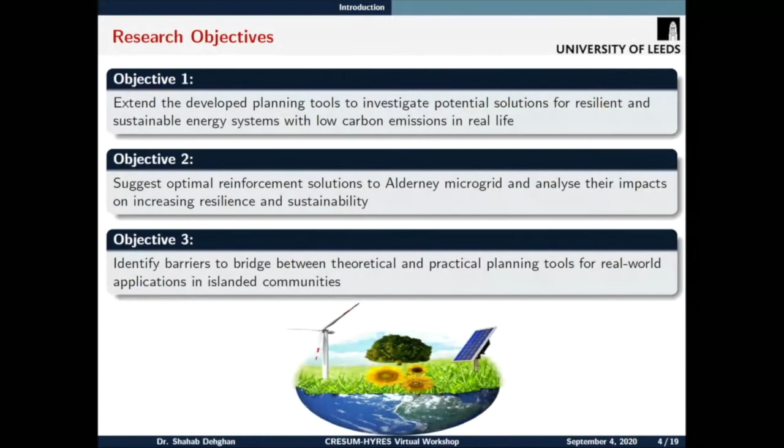So with this background, the main objectives of this project are firstly, extending the developed planning tools at the University of Leeds to investigate potential solutions for resilient and sustainable energy systems with low carbon emissions in real life. Secondly, suggesting optimal reinforcement solutions to the Alderney microgrid and evaluating their impacts on increasing resilience and sustainability. And finally, identifying the main barriers to bridge between theoretical and practical planning tools for real-world applications.

So we have utilized in this project PyEplan, which is an open source Python-based energy planning tool developed at the University of Leeds to create microgrids in the CRESUM-HYRES project. PyEplan is coded using Pyomo, and its first version has been released on PyPI. In general, PyEplan collects different inputs such as estimated load demand, estimated renewable power production, and network topology. It also includes 3 different modules.

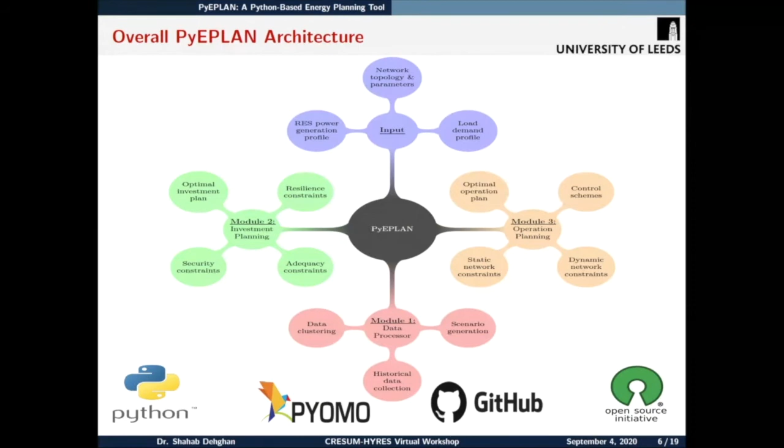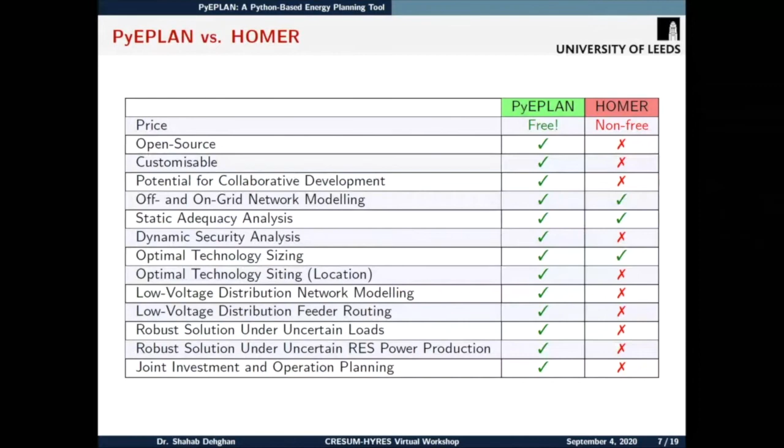The first module is focused on data processing, and it provides needed inputs for the second and the third modules. The second module provides the optimal investment plan for microgrids, while the third module provides the optimal operation plan for microgrids under different techno-economic constraints. PyEplan has also specific advantages as compared to other commercial software packages for designing microgrids. For instance, PyEplan is useful for both static and dynamic security analysis, uncertainty management, and joint investment and operation planning, which are impossible on other software packages such as Homer. Okay.

Now let's move to the mathematical formulation of the investment planning problem. The objective function of the investment planning problem minimizes the total investment and operational costs under all financial and technical constraints, including power flow equations and adequacy, security, and resilience constraints.

In general, the investment planning problem is a highly nonlinear and non-convex optimization problem under different types of uncertainties. The nonlinear and non-convex characteristic of the investment planning model results in a complicated optimization problem which cannot be solved by commercial optimization tools straightforwardly. For instance, the nonlinear and non-convex solution space of a simple 3-bus test system is illustrated on the top figure. Clearly, the solution space of a practical microgrid will be more complicated than this 3-bus illustrative example.

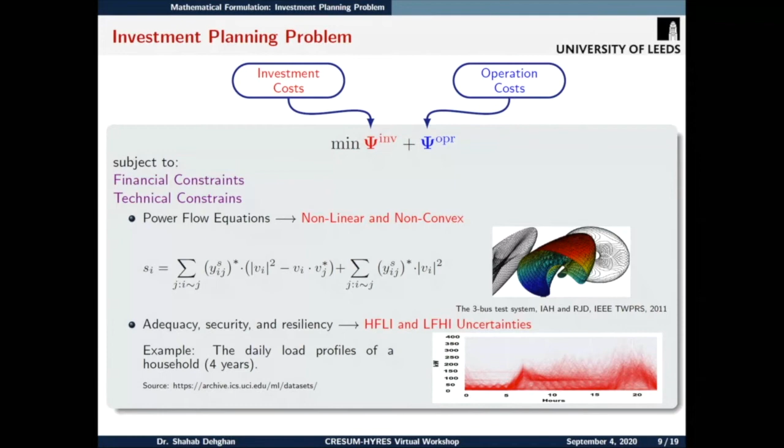Also, uncertainties may result in a considerable financial loss or serious issues related to adequacy, security, and resilience of the microgrid. For instance, the load profile of a simple household during only 4 successive years as a high-frequency uncertainty source is illustrated on the bottom figure, and its variations can be detected clearly.

To resolve these limitations, a linear formulation is used in the first version of PyEplan. Accordingly, a 2-stage stochastic optimization is utilized as a non-deterministic optimization method wherein investment variables are here-and-now decisions and they are not a function of uncertain parameters, and operation variables are wait-and-see decisions and a function of uncertain parameters.

Also, the K-means clustering technique is used to characterize the interday and intraday uncertainties of load demands and renewable power productions. To this end, inter-day uncertainties are characterized by representative days belonging to different clusters, and intraday uncertainties are characterized by risk-seeker, risk-neutral, and risk-averse representative days corresponding to 5% quantile, 50% quantile, and 95% quantile of each cluster.

In addition, power flow equations are approximated by the LinDistFlow equations, and quadratic line flow equations are approximated by a polygon approximation. So the final optimization problem will be a tractable mixed integer linear programming problem, which can be solved easily by commercial software packages.

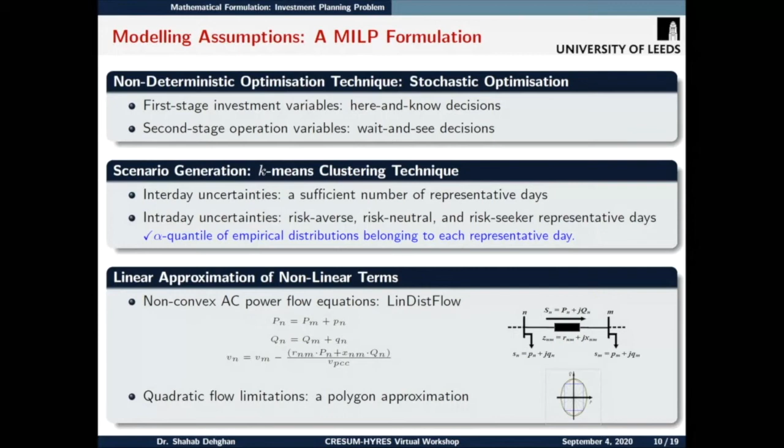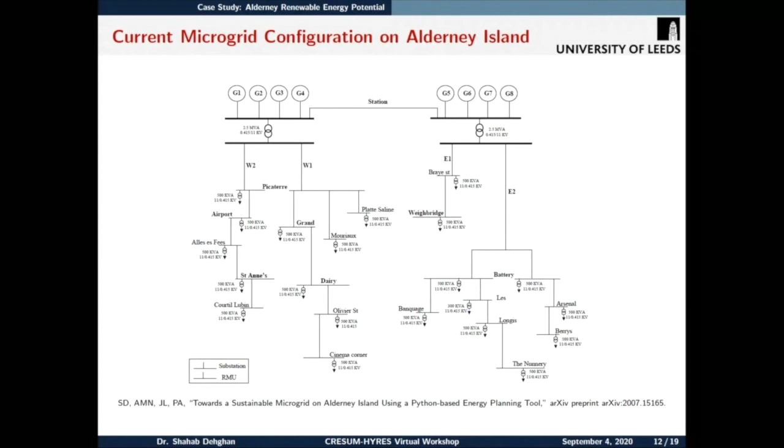Also, the yearly patterns of load demands and renewable power productions in 2013 are shown in this slide. According to these figures, the peak load on the Alderney microgrid is about 1.2 megawatts, and the capacity factors of solar and wind units are about 16% and 54% respectively. So the capacity factor of the wind unit is significantly higher than the solar units.

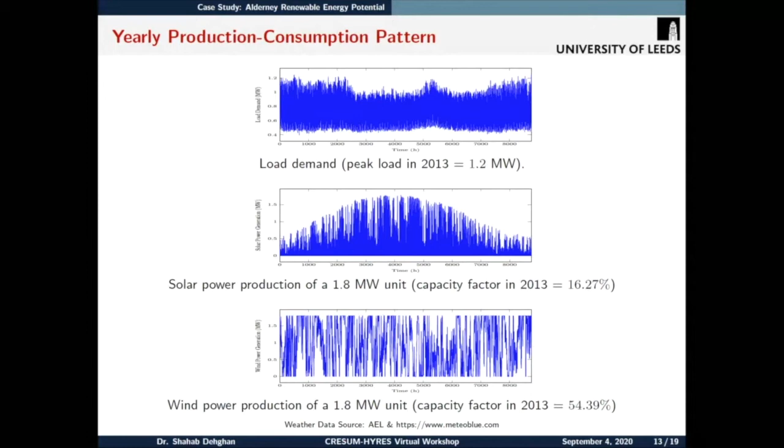In this research, to obtain the optimal reinforcement plan for Alderney Island, 6 different case studies are considered here, including different numbers of wind units, solar units, and battery units. In addition, case 6 considers all investment candidates in addition to the current diesel units in the Alderney microgrid.

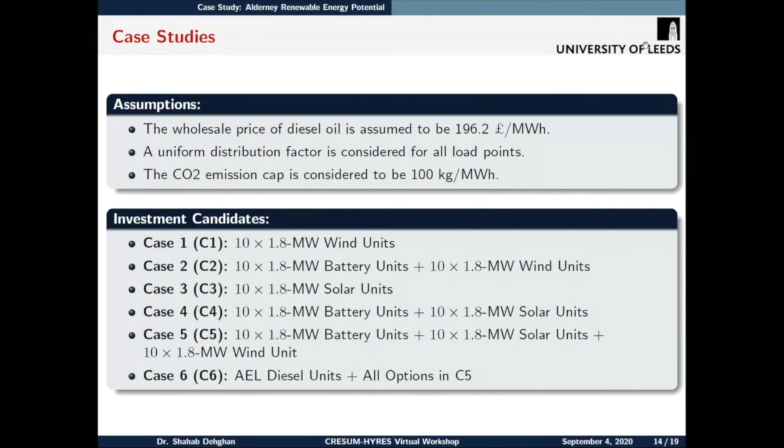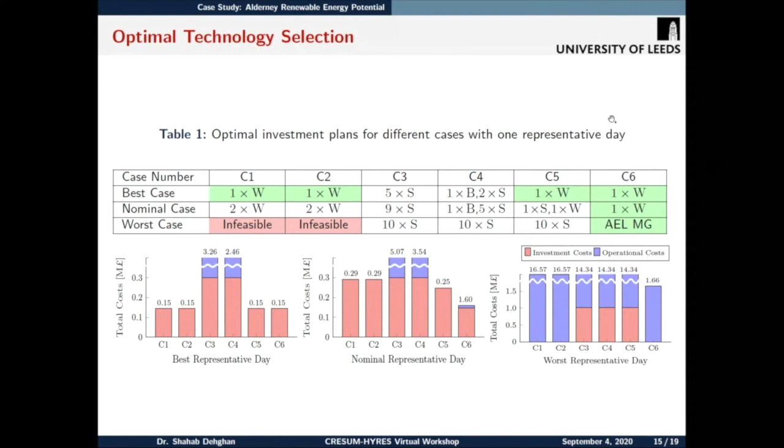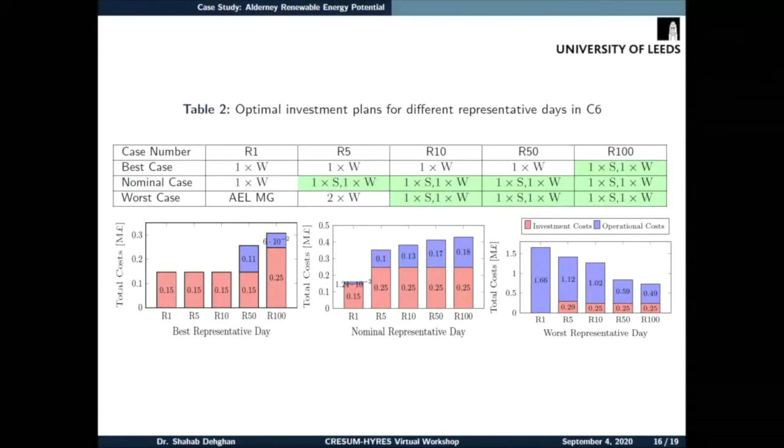Therefore, in summary, it can be concluded that, first, free open source tools with solid mathematical formulations can be used for creating real-life microgrids. Secondly, the optimal design, even in small-scale microgrids, cannot be obtained without a proficient planning tool estimating the potential of renewable energy resources. Third, the lack of sufficient data is one of the main challenges in proper analysis and optimal design of microgrids, particularly in rural areas. And finally, inaccuracy in network modeling and mathematical formulation may be translated into a considerable financial loss.